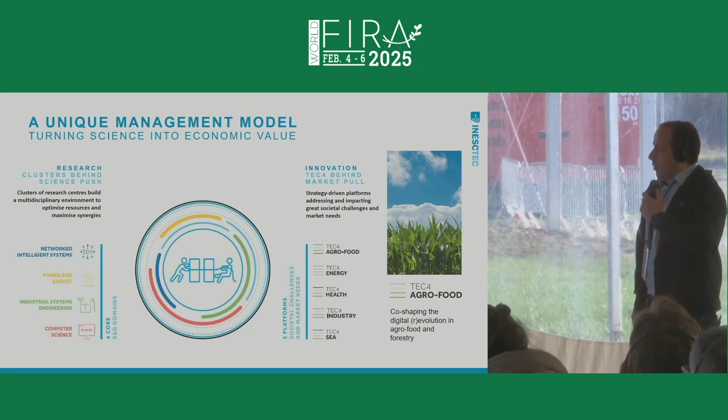In numbers, INESC TEC is a private non-profit R&D organization with more than 1,000 researchers, established in the main universities of the north of Portugal. We have more than 19 laboratories, and we have replicated the same model in Brazil. We have 13 centers grouped in the main areas for industry, artificial intelligence, and robotics, and how we deal with these 13 centers for the market.

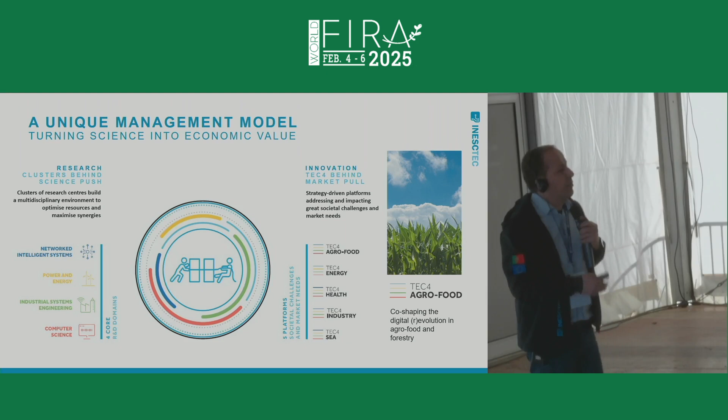We have grouped them in several initiatives that we call technologies for something. In this context, we have the technology for agriculture and forestry, and our motto is to co-shape the digital revolution in agriculture and forestry. This is what we bring here, our help and knowledge in ICT and robotics technologies to help companies innovate in this field.

How do we do it? We do it with what we call the triangle of innovation, where we listen to the needs and desires of the companies or end users, and based on that knowledge and needs, we build new prototypes or technologies that solve that problem. We feed the technology providers that afterwards put this technology in the market. So this is our positioning in the market - we don't compete with companies, we help companies innovate their product portfolio.

To do that, we have this catalog of competences. Mostly the technology we are bringing nowadays for the sector is robotics, AI, IoT, big data, and artificial intelligence. We have people specialized in each of these domains to help innovate the products. To support this initiative, we have 4 laboratories that help build these prototypes, and one of them is the TribeLab, focused on robotics and IoT - we call it the Tribe Laboratory.

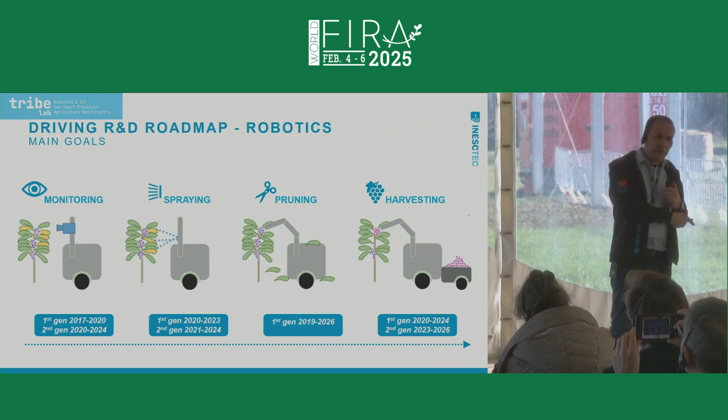Besides this big team, we also have pilot cases. These pilot farms are from our partners, big companies for winery growing or vineyards, where we can test the technology and validate with these end users if the technology meets their interests and needs. So we don't do just technology in the laboratory, we go from the idea to testing in the field.

Besides that, we established these milestones in 2014. We want to have robots that could do these operations fully autonomously in steep slope vineyards. Firstly, robots that could go to the vineyards and extract maximum information about the vineyard.

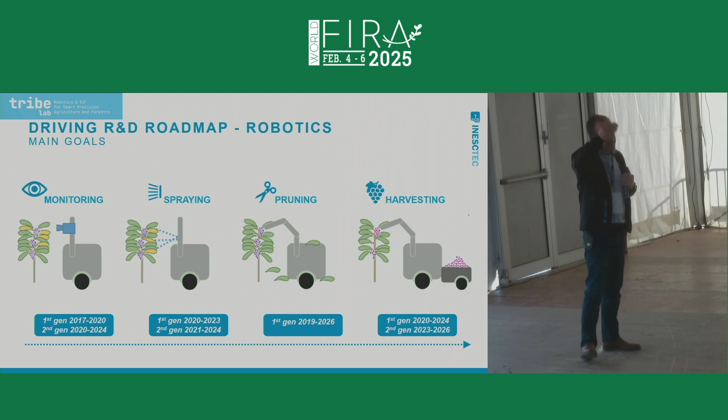The second stage was to build a robot that could do precision spraying in these vineyards. The third and last stage is pruning and harvesting. These milestones will finish in 2 years from now, and we have almost accomplished all the milestones we proposed for ourselves. So we are now thinking about the next 10-year roadmap for our development.

To do so, we started from technology that exists in the market that wasn't answering all the needs of farmers, and based on the experience we gained with that technology, we created 4 families of robots that we call Weta, Model E, Model X, and Orioos, which you will have the opportunity to see afterwards in our demonstrations in the fields.

Okay, what are these platforms? The Orioos robot is a very small and compact robot that has wheels, and on top it has the benefit of using Android-based technology and smartphones to be the brain of this robot.

What can this robot do? It can go to the field - I hope you can see the video playing, okay? It can go to the field and understand where apples are growing and create a map of production. So the farmer will understand which plant is producing more or less apples, and manage much better what should be treated in the field.

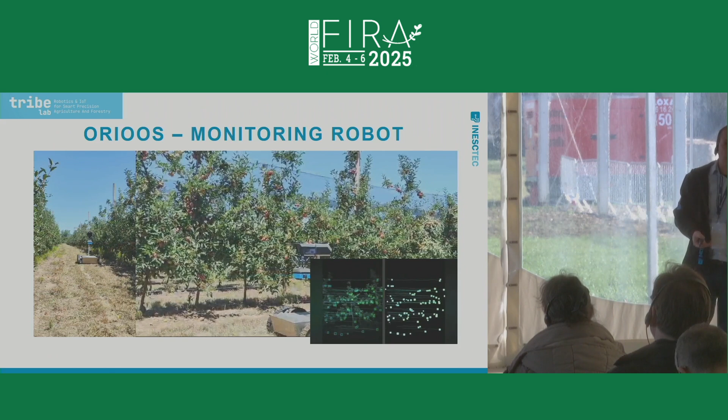Besides that, this robot can identify, for instance, water leakage in the field. If you have a problem on the water pipe, it can identify that there is a problem in the field. So it's your surveillance guy that is able to go to the field autonomously and make this monitoring.

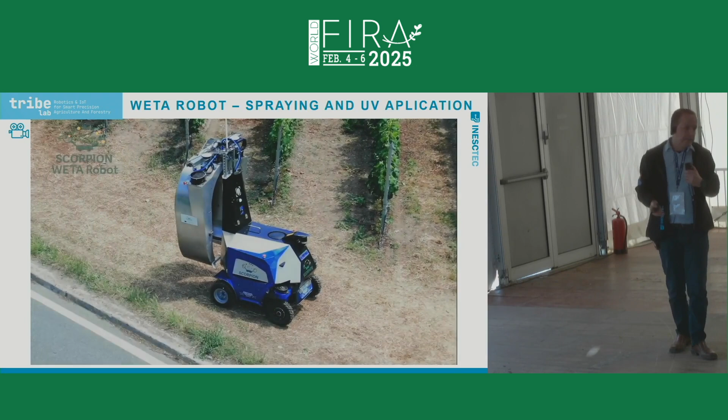And now we have the Weta robot. This is a project we coordinated in the European framework, and we built a robot fully from scratch. This is a robot that can go to any steep slope vineyard and create and apply fertilizers, chemical products, or even UV light treatment.

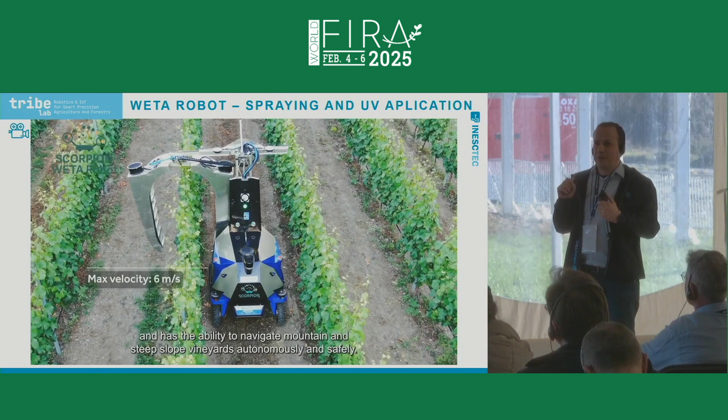I don't know if you are listening. Yeah, probably you are listening. The sound, right? I don't know if it's too loud. You are not listening to the sound of the video. I don't know if it's possible to put more loud. No.

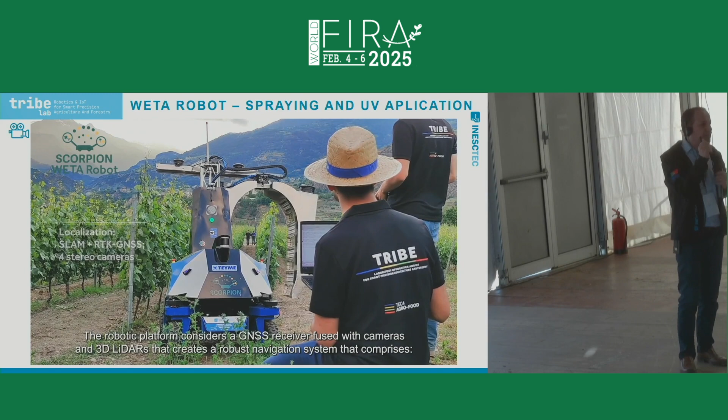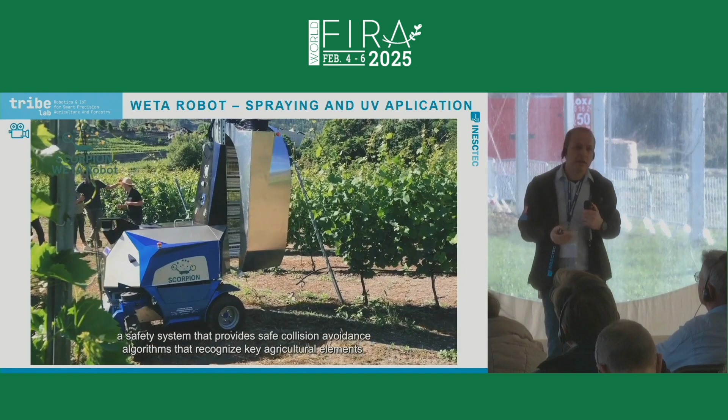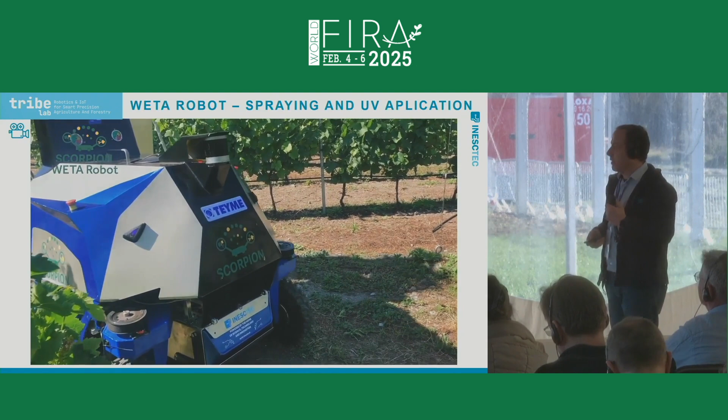This is a very efficient technology. It reduces power consumption in terms of energy, being 10 times more efficient than conventional tractors and sprayers. It can also turn around in a very short space, enabling farmers to have more plants in the field if they choose to.

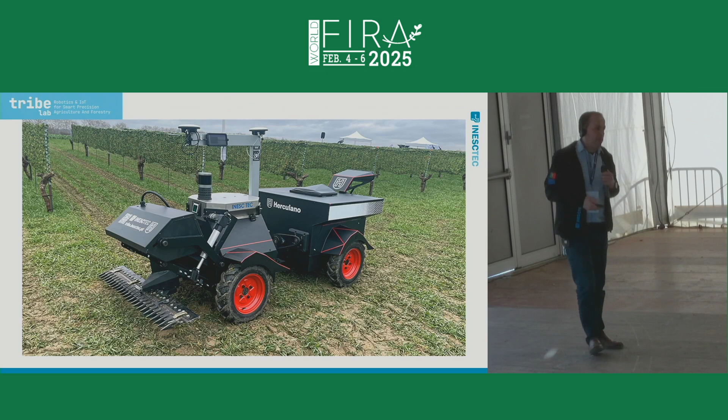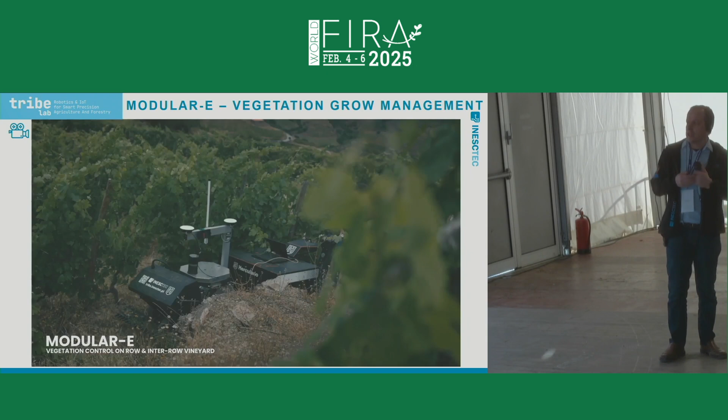This is another robot that we call Modular-E, which has several features. One of them is the capability to go to the field with a mowing tool that manages vegetation growth control in the line and inter-line of the vineyard. As you will see, this robot can go to any vineyard, including this steep slope vineyard in the Douro region, and it has a tool that can cut the grass.

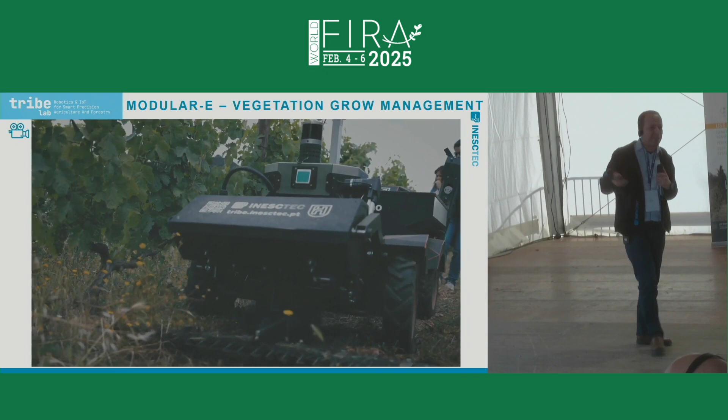In our demonstration field we don't have this grass, so you won't see that here, but in the real vineyard you can see the robot cutting the grass, even below the vines. This uses different technology than is normally used, for two reasons: it's more efficient in energy consumption, and it doesn't create sparks that can cause fires afterwards.

This is a problem we might face in the north region of Portugal, so we are very aware and scared about that.

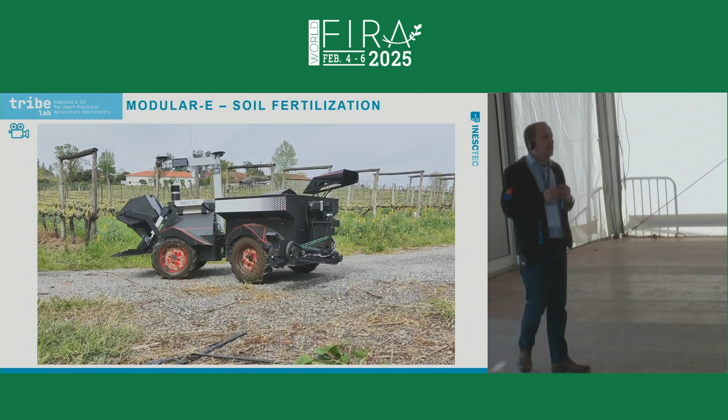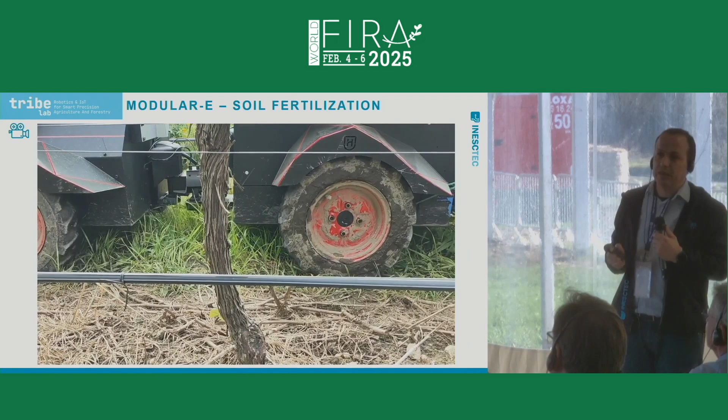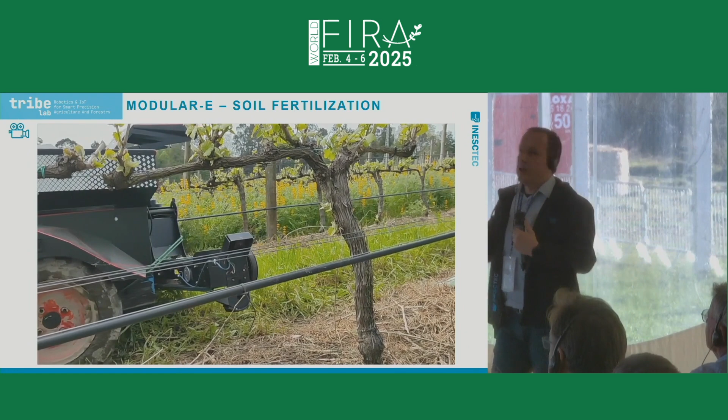Besides that, this same robot is able to apply fertilizers in the field. It can identify where the trunk of the vine is — in this vineyard we have trained the robot to detect where the vine trunk exists, and it's able to precisely apply the product where it should be applied, according to the need of each plant. So we have the capability to apply the product individually to each plant.

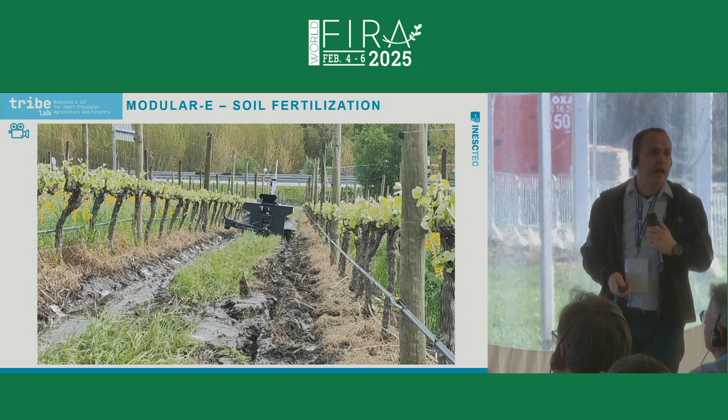I brought this video because of this experience: the robot was able to cope with this scenario. Normally a tractor cannot go there, but this robot was able to pass because of its amazing traction feature. We have a 4-wheel traction system that is fully electrical and able to cope with this challenge.

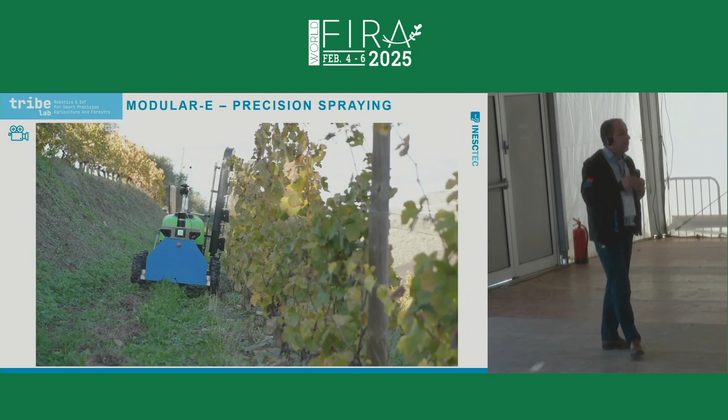This is the same robot, but with a sprayer. It's not as efficient as the beta robot, but it's more compact and more cost effective, so we can reduce a lot of the price of this machinery.

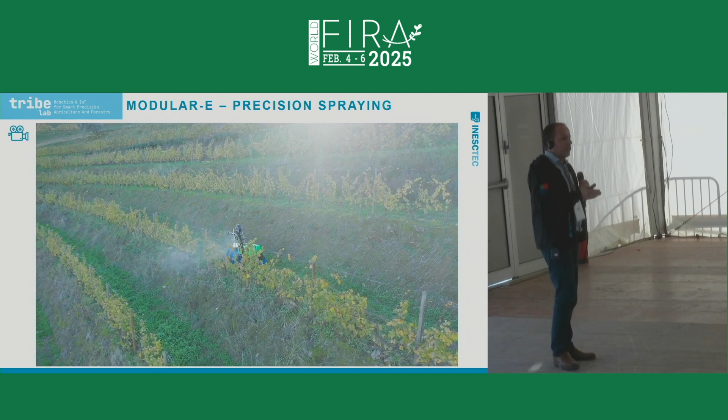As you can see, this was a test to demonstrate to farmers that it can also blow a lot of product onto the vineyard, if the owner wants to do it that way. But this isn't the normal way we should do it — we're just showing this video so you understand that if you want to blow a lot of product into the air, we can do that too, fully electrical.

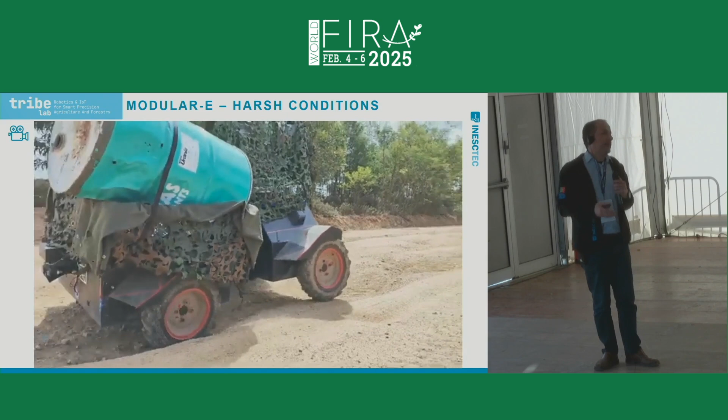As you might see, it's not as organized as a vineyard normally is, and this was a challenge for us to prove we can reuse the same technology for military operations. Since nowadays we need to invest a bit more in defense, we can put money into robotics that has dual use, benefiting agriculture but also defense if needed.

So the main innovations we are preparing for this coming year are more tools for these robots.

One of them is a harvesting tool for vineyards that could cope with some challenges, collecting the grapes in a more efficient way.

Besides that, we are working on a proximal sensor that can diagnose 40 parameters in the leaf of the vineyard, the state of the plant, but also in the grape, to understand in each state of maturation the plant is working, is staying.

With Modular-E, you will have the opportunity to see the eucalyptus trimming or pruning. And we are working also on planting and biomass control.

We don't have only robotics, we have also IoT technologies. Using our expertise developing robotics and knowledge, we have also developed new technology that could feed the robots but also the farmers with more information that is not only perceived by the farmers through the eyes, ears or mouth. So we have technology that the farmers can use in their hands.

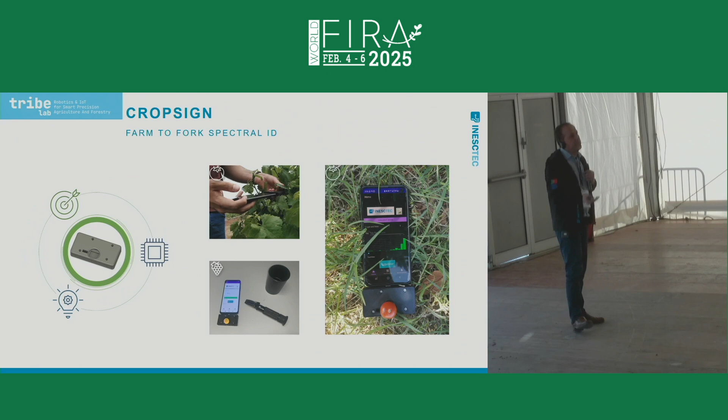It's something that you can plug into your smartphone. It has hyperspectral sensing, so you can put it in the field, extract spectral information that afterwards can feed you with more detailed information about the maturation of your fruit or even the health state of your plant.

Besides that, we have a smart scissors. This is one thing we like to show because it's also another patented technology, and sometimes we cannot go with robots - we need to understand that, and instead we need to have a productivity map of the field.

So what we have here is very simple technology: a scissors that has Bluetooth technology to understand when we have made the cut, and a bucket that can weigh the grapes when I take them from the plant and put them in the bucket.

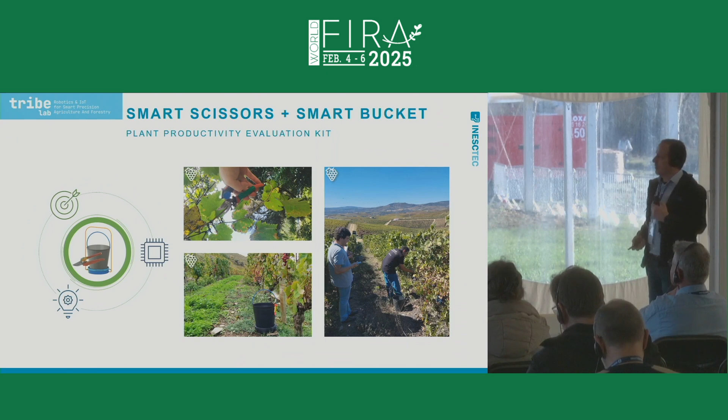With this information I can create amazing maps like this one - sorry, it was in Portuguese - showing how much grape is being produced in each region of my crop.

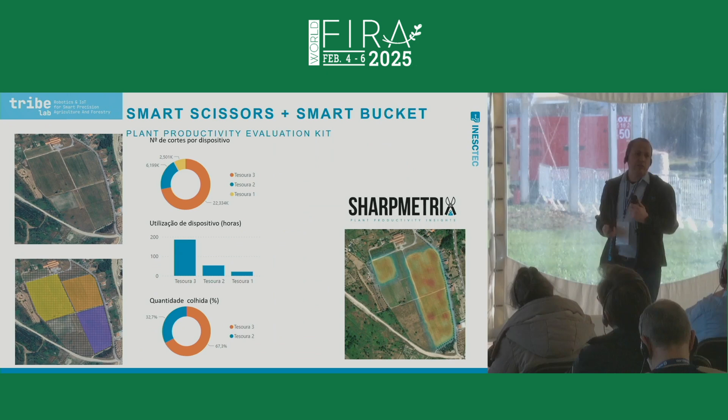This is very relevant for the farmer to understand where they should put more fertilizer or less fertilizer, so this is a simple technology for vineyard owners who don't have the capacity to buy more advanced machinery. They can use this technology to understand where the grapes are being produced.

I want to leave you with this message: if you want a new robot, a new IoT technology to address your problem, need or desire, please tell us. If you want to have a robot for your portfolio, we are here also. We are proud to build from idea to TRL9.